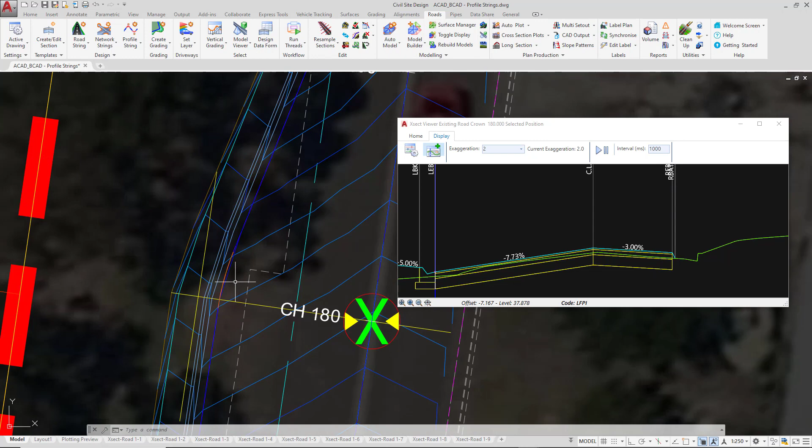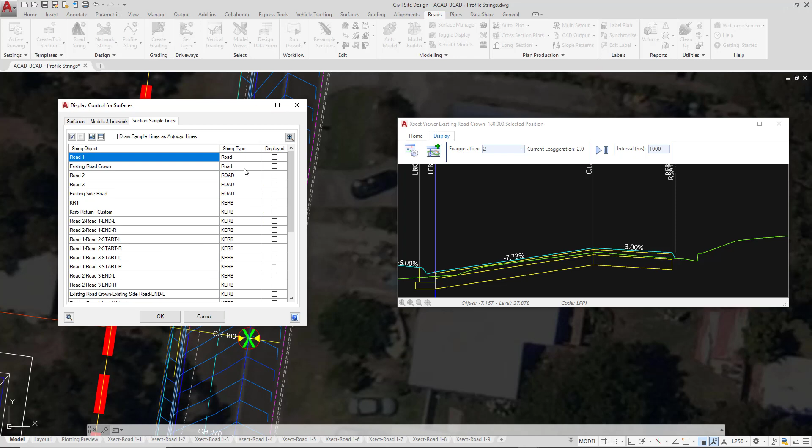To help us understand why the existing road crown line work does not match up exactly onto the profile string in these particular areas, we're going to turn on the display of section sample lines, which is something that we did with respect to the design data form and applying multiple templates. We're going to go to the Roads tab and click on Toggle Display. And there we're going to go to Section Sample Lines and then turn on the display of existing road crown and then click OK.

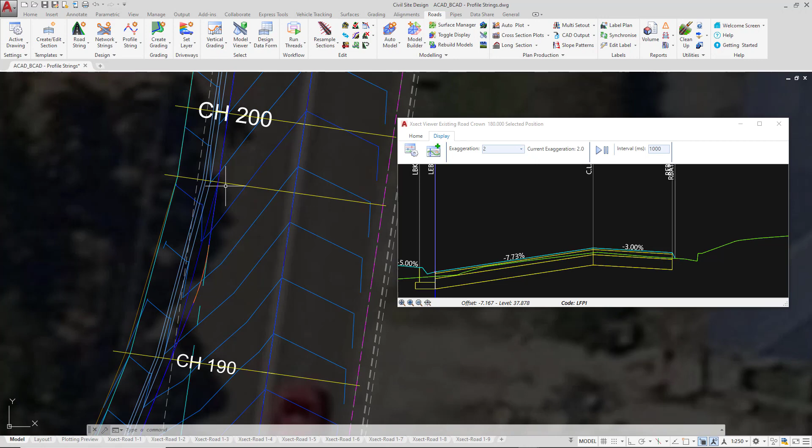What you'll notice is that wherever we have one of these yellow lines, this is where the software has drawn our template and then also applied the design variation. So it's moved the left edge of bitumen onto the profile string. In between, however, that hasn't happened. To resolve this, what we need to do is to add additional sample lines to give us that detail and have the template being moved onto the profile string all the way through.

To do this, we go up to the Resample Sections pull down and click on the button which is Add Extra Sections. It wants us to pick a string that we were going to edit, so we're going to left click on Existing Road Crown, and what we're going to do is to add a range of extra sections through a chainage range of our choice. So we've got two ways of doing this. We can pick on screen the start and the end of these locations, or we can type in numbers.

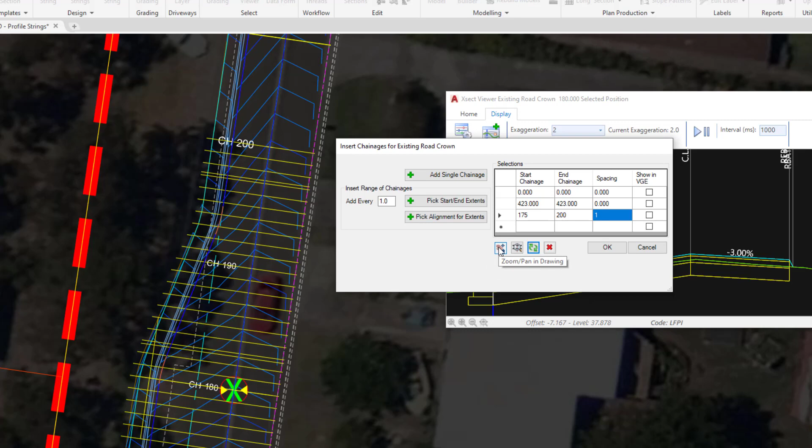So I can see the start chainage would be prior to 180, finishing around 200. So in the first cell we'll type in 175, the end chainage will be 200, and then the spacing can be every 1. Now, rather than clicking OK and leaving the form, you can just simply click on the refresh button to see the change. As they've now gone in, we'll need to zoom using the zoom button here. We can't just simply pan in the drawing. And you can see how the line work marries up very, very well through those particular areas.

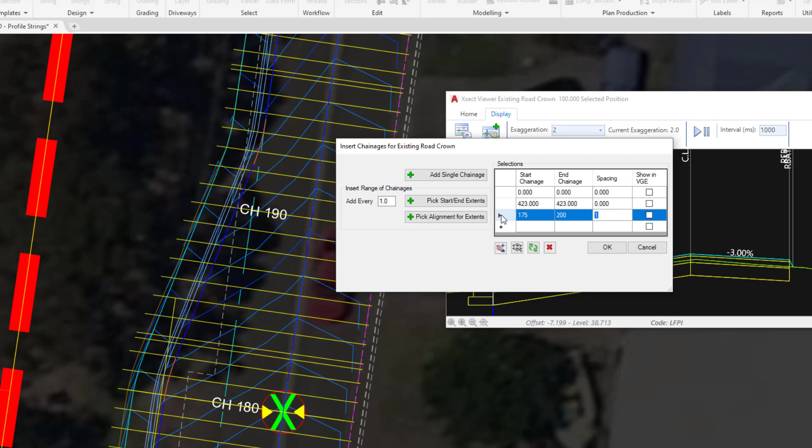Now, you could refine this further. If I press Escape or Enter, you'll notice that we can continue to add entries. So if we wanted to, we could refine the area, say for example around this curve, and add in detail of every, say, 0.1. The picking option, which we've got here, is an alternative to typing in the cells. So if you can't actually see the changes, then the picking option is a good way of adding these in. So what we'll do is we'll select the row at the start by clicking on this little arrow and then clicking on the Delete Entry button. If you strike refresh, those will now be removed from the drawing.

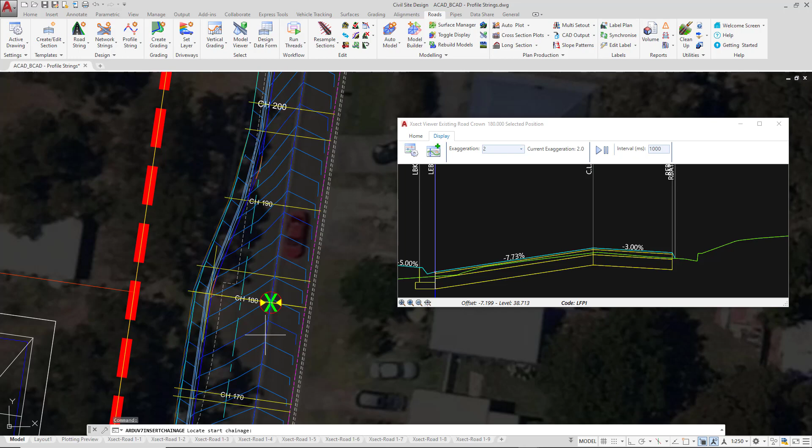We're going to use the Pick Start End Extents button. This wants 2 clicks. So the first click is just going to be somewhere roughly here. If you've got your snaps turned on, I recommend that you turn them off. Otherwise, the first point will be to wherever your snaps connect you to. And once you've left clicked, you'll notice down the bottom on the command line, it then says Locate End Chainage. So I'm just going to left click roughly just up here. As soon as we do that, the software adds those 2 points in and then uses the spacing value of every 1 to add in these samples. So we could change these values and round them off if we want.

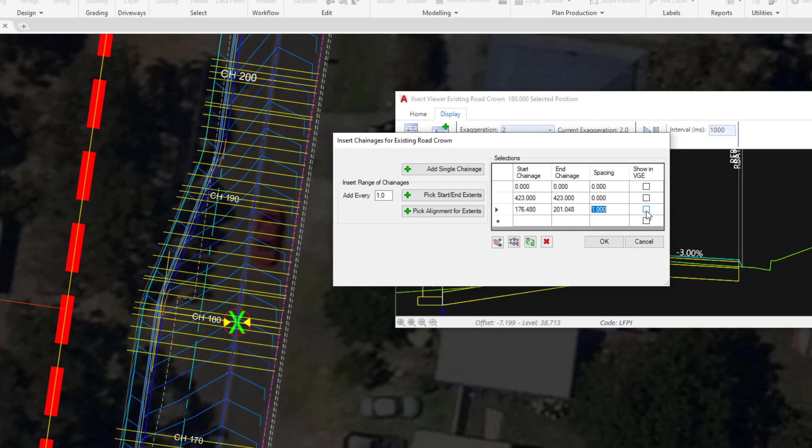You don't need to be showing these sample lines in the vertical grading editor. These are really here to help us refine the geometry. We don't need to be seeing them in respect of the vertical design. Click OK. Now we're going to turn the display of the sample lines off. We're going to go up to Toggle Display, Section Sample Lines, Existing Road Crown, and click OK. If for whatever reason they don't disappear immediately from screen after closing the form, just type RE on your command line of your CAD platform and just press Enter to refresh the screen.

Finally, we're just going to look at how we can manage the design variation we've added in. So if you don't have a cross-section window open, that's absolutely fine. You can go to the Vertical Grading Editor pull down, click on Section Window, and then you can left click twice, roughly around chainage 180, firstly to pick the string, and then secondly to pick the chainage. What I'm going to do is to right click in the cross-section window that we've got open here, and then click on Open Section Design Data. You can see the entry that we made earlier, and this can be edited or removed if we want to.

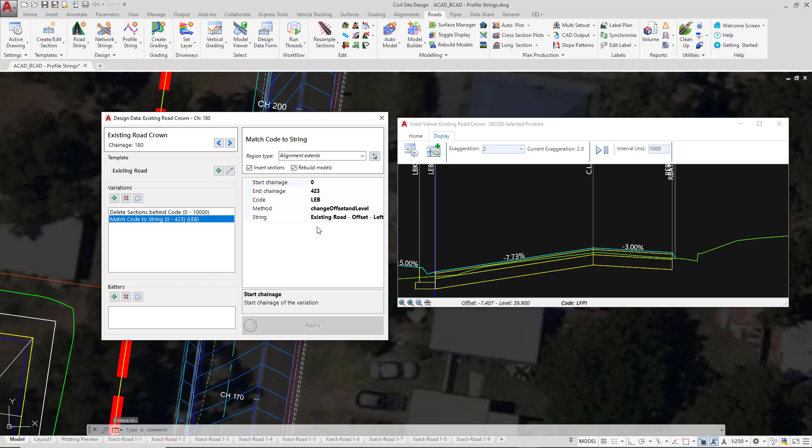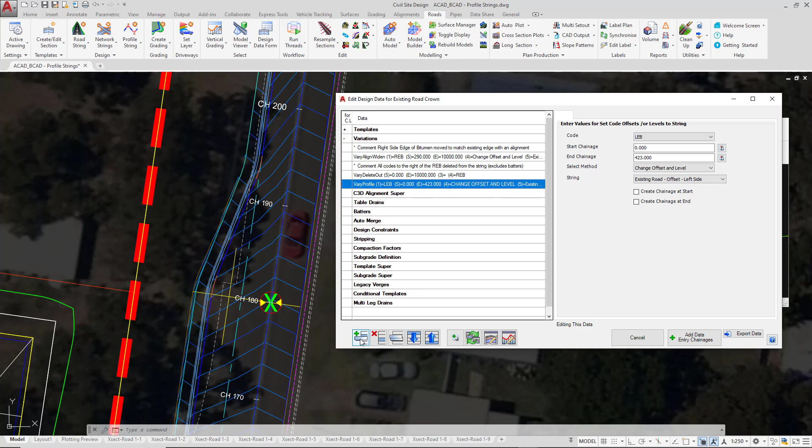We can also review this in the design data form. So if you go to the Home tab of the cross-section window, we have direct access to the design data form, so we can click on that, click on Variations, and the entry we've added in is sitting there. Now, further to some of the comments we made when we previously reviewed this part of the form, you can always go in by clicking on the little Add Entry button and add a comment. Adding a comment will help you describe what's going on with the variation, and it is an excellent discipline to get into when you're applying design variations on strings. I'm going to click cancel. I'm going to close that down. Also going to now close down the cross-section window.

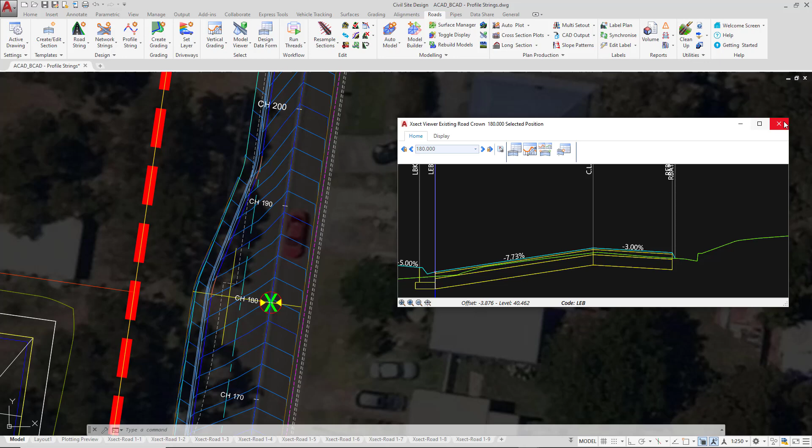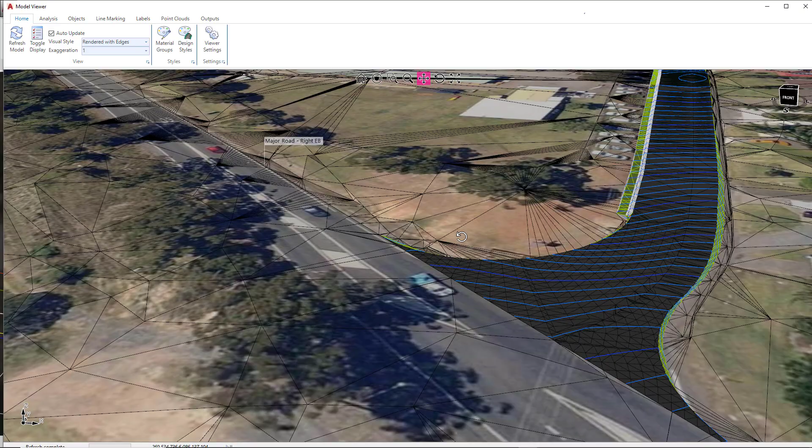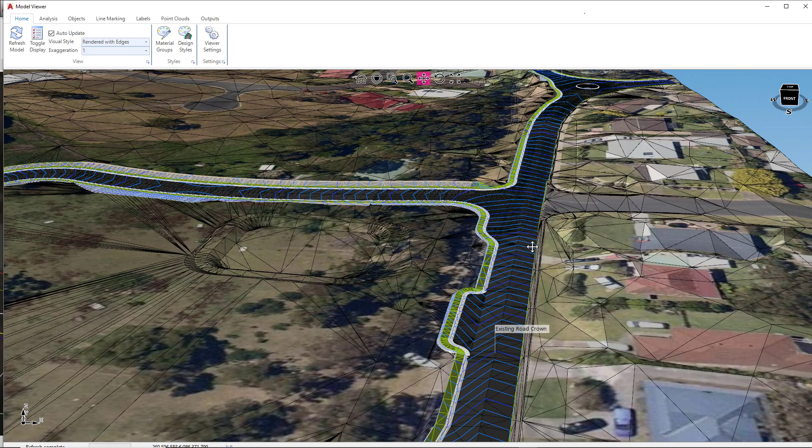Let's now have a look at the results of this design change in Model Viewer. You can see how that intersection has been moved and tied back up. You can even see now we've got some nice smooth transitioning going on over the course of that profile string. Now we're going to have a look at how we can control the elevations of the profile string in association with existing road crown.